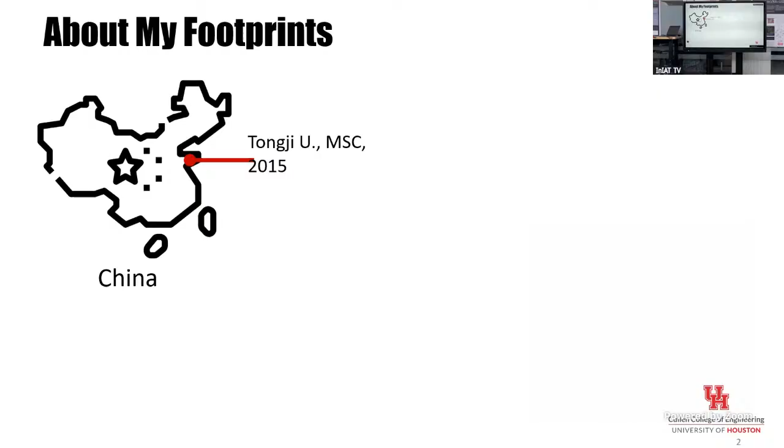Just a little bit about myself, though I think we already have an introduction. I moved from continent to continent, and of course my wife complained a lot about that. My last station was in Shanghai, China, then I moved to the Netherlands, and started my adventure in the United States. Now I'm an assistant professor at the University of Houston.

Just a little bit about the University of Houston, in case you're not familiar with it. University of Houston is the largest public research university in Houston, and one of the largest in Texas, since we also have UT Austin and Texas A&M which are also big. We are very proud of our university.

If you're familiar with the education system in the United States, the categories of R1 and R2 are very important. R1 means we have the highest level of research activity. We are approaching the milestone of 50,000 students, and we have more than 200 million dollars in research investment. Our campus is very large, about 900 acres.

A little bit about our Cullen Engineering School: we have around 2,000 graduate students, including master's and PhD students, more or less 8,000 undergraduate students, and more than 200 faculty members. We have 10 engineering majors, all ranked in the top 100, and some even in the top 10. Our overall engineering ranking is about 17 in this year's US News ranking.

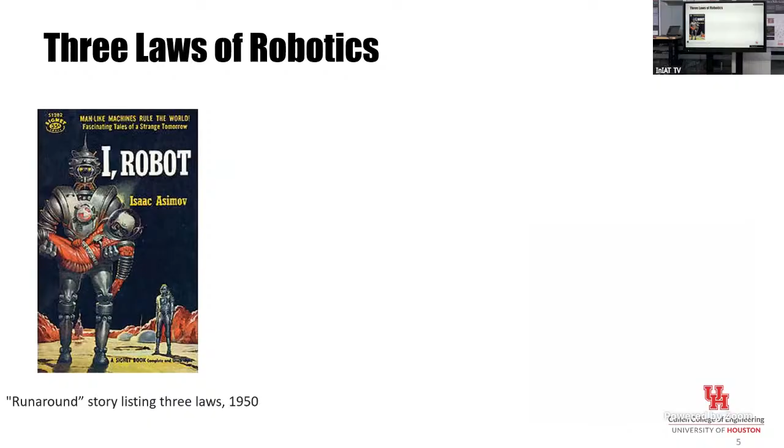I'm not sure if you agree with the 3 laws, but let me list all of them. First, the robot must not injure human beings, of course, right? Second, the robot must obey the orders given by human beings, because we create the robot, it must follow our orders. And third, the robot must protect its own existence.

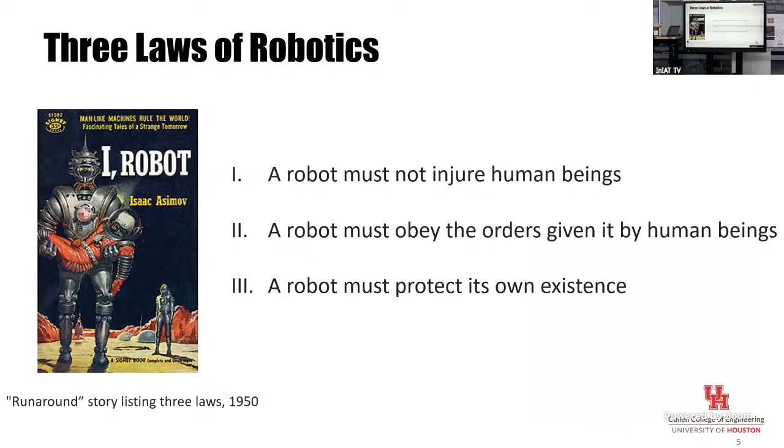If you try to summarize these 3 laws, we can say the robot must complete missions and stay safe. The first law and the third law are both about safety. One is about safety when the robot interacts with human beings, the other is the robot must be safe for itself.

Let's look at some counter examples of the robot not adhering to these 3 laws. The first one happened in a warehouse, where the robot went crazy and tried to attack people around it, and unfortunately the stop button was far away from the two workers.

The second example was from a Tesla. I can see a lot of Tesla cars running in Mexico City, but sometimes, not very often, we have also seen some unfortunate accidents. In this case, the Tesla autopilot was on, there were no disruptions to the car, but it suddenly turned left and experienced a crash.

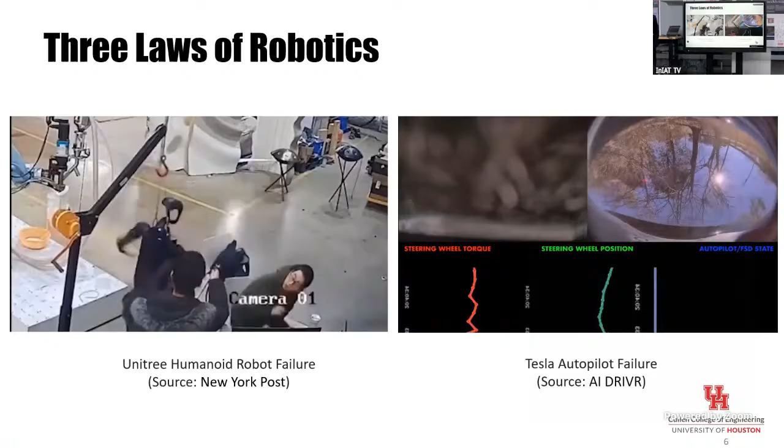Okay, those are two counter examples. So what we do in our research lab, in one sentence, is build safe and reliable autonomy, especially for robotic systems.

We have some theoretical foundations. The first one is optimization - we do robust optimization, trajectory optimization, and also machine learning: safe reinforcement learning and uncertainty quantification using deep neural networks. I'm also a control guy, proud to be one, and we do disturbance observer and rejection control - I think a lot of our colleagues are working on that. I also work on control barrier functions, a very new popular tool to guarantee the safety of robots.

All of our applications are in robotics. The first category is extreme agile robots - we do drones operating in extreme cases, like high speed or with propellers missing, so how to safely control the drones. The second is autonomous racing cars - unlike normal cars with low velocity, autonomous racing cars have high velocity and experience very large nonlinear dynamics. We also work on safe motion control under uncertainty, like manipulations and legged locomotion.

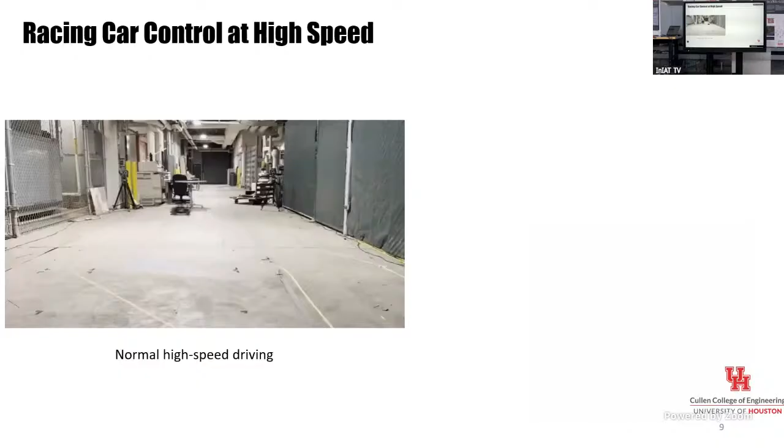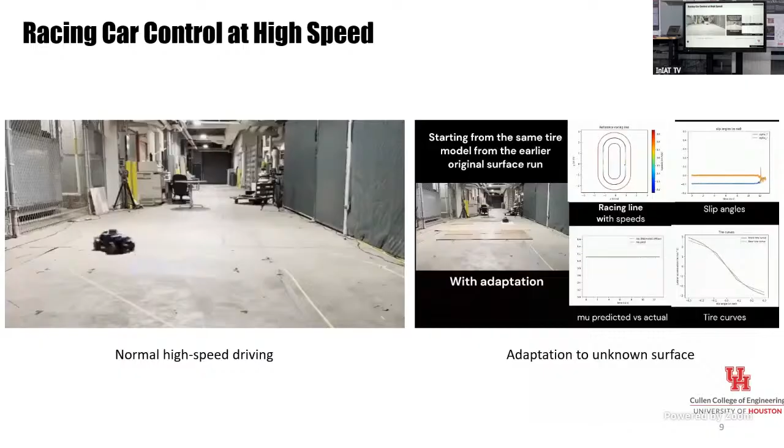We also do racing car control at high speed. For high speed, your control objective really needs to minimize the lap time. We also test how you adapt to a new surface, for example a friction change from the normal surface to another surface which is unknown in advance.

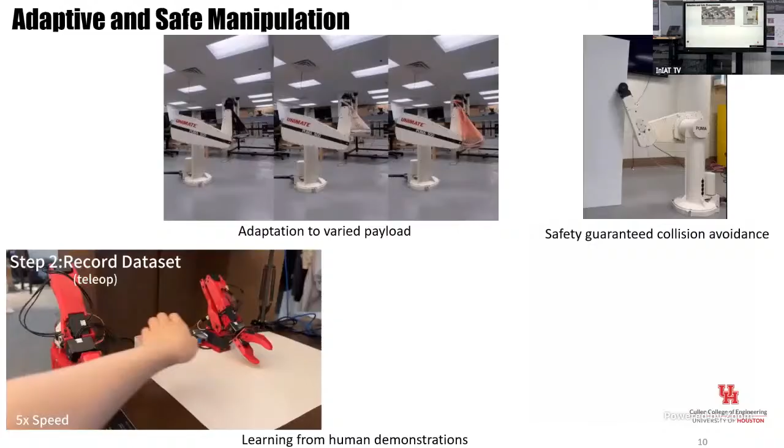We also do safe manipulations - the manipulation needs to adapt to varied payloads, and it must be guaranteed to be safe when interacting with people. We also do new stuff like AI-based manipulation.

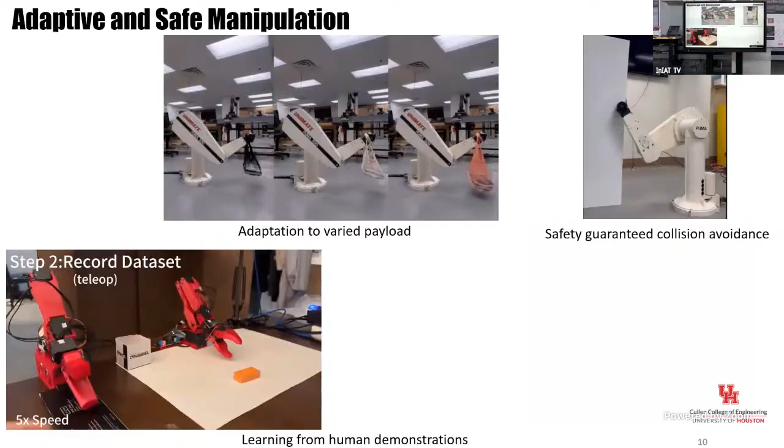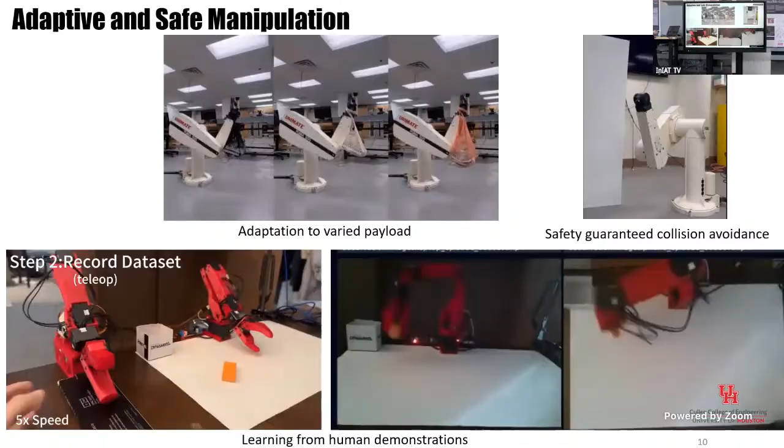I can see some colleagues here who also have these leader and follower manipulators. What we do here is use one as the human for human demonstration, collect data, and use deep learning. After training the neural network, you can deploy it to the follower manipulator, so with just a camera as input, the manipulators can autonomously pick and place.

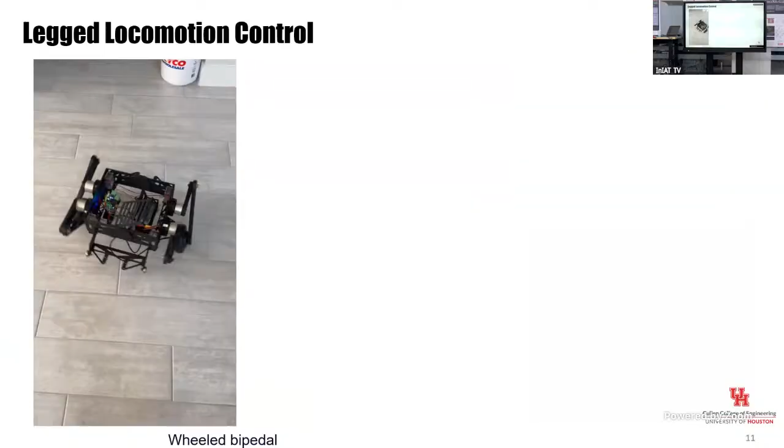I cannot show all of them, but I want to show some selected demos. We also do legged locomotion, like wheeled bipedal robots. This one isn't a balancing car - it can change height and auto rotate. There's another wheeled bipedal robot that can climb stairs.

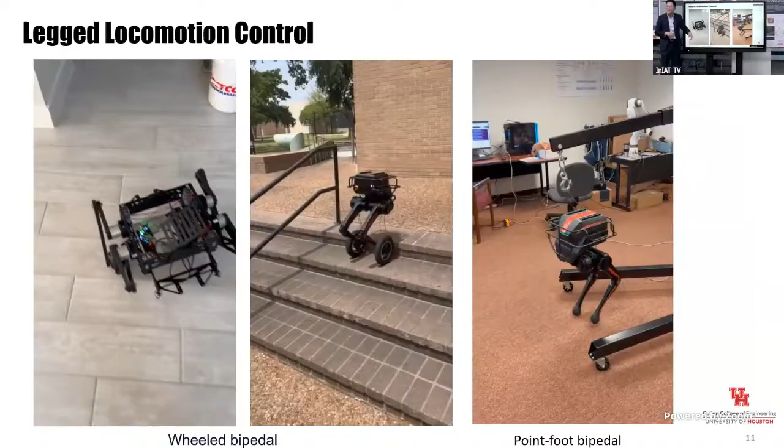The last one is about changing the wheel - you can change the mode. Now it's in wheeled mode, but you can change to point foot, and both of them are based on reinforcement learning.

Okay, so let's look at why it's difficult to follow the three laws in robotics. First of all, we look at the autonomous system. It's a very common architecture for autonomous systems.

We have the cyber component, right? We have the controller, and all the computers and computer networks in this cyber component. And we also have the physical component: sensors, actuators, as well as the physical plant.

Let's look at the first one. In the cyber component, right now we are introducing a lot of AI algorithms. AI is good, no problem, but sometimes if you have a safety critical system like autonomous driving cars, like Tesla, you cannot completely rely on AI. AI makes mistakes, but if your system is safety critical, you don't allow any mistakes caused by AI. That's why AI sometimes makes things more complicated in the cyber component.

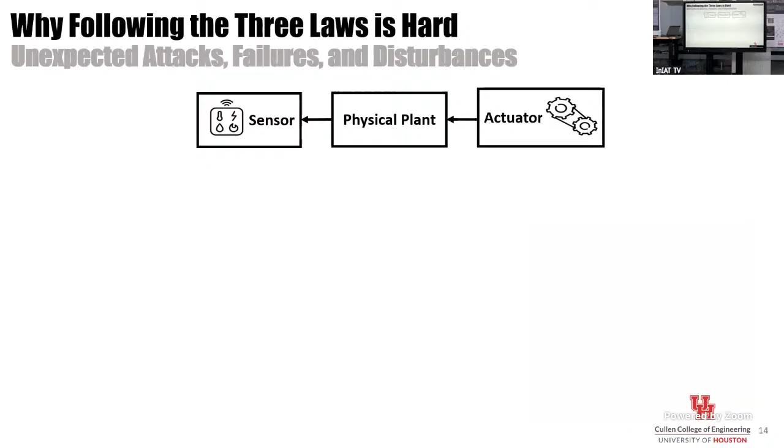And in the physical components, we have sensors, physical plant, and actuators. But we also have some unexpected attacks, failures, and disturbance.

Let's look at the first one. If you play with drones, the first very important lesson you need to know is that you need to make sure all the screws are not loose. If you lose any of the screws, the propeller will be gone and the drone cannot be stabilized.

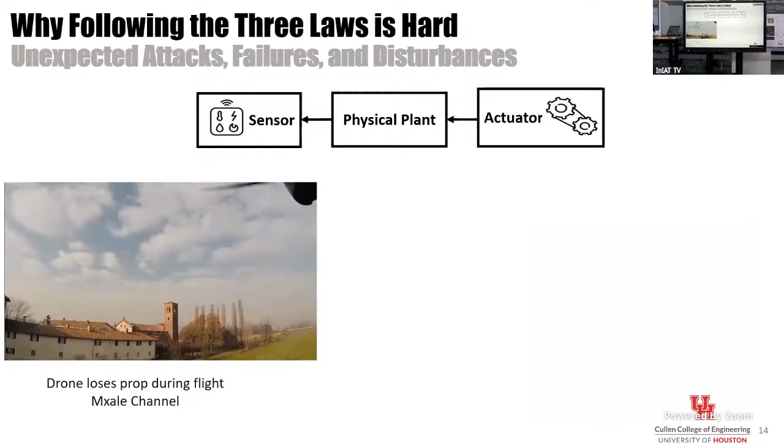And the first one is very interesting - there was a drone in Canberra that delivers coffee to customers, but it was under attack by a raven. So that's something we don't expect in advance.

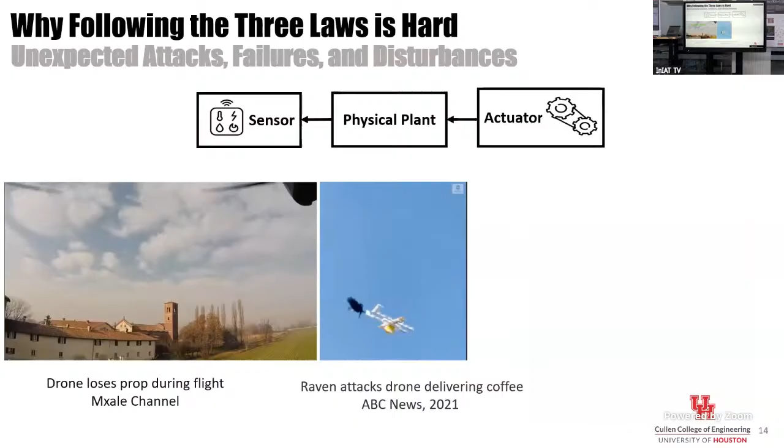And we also have some unexpected disturbance like wind. Of course, this is in a lab environment to simulate the real world, but we have a strong wind as disturbance. So all of this makes the problem very challenging to guarantee reliable and safe operation of robots.

So today's talk will be divided into three parts. The first is how to measure the disturbance and how to reject the disturbance. The second is, if you have disturbance, how to guarantee safety. And the last is how we can combine some advanced algorithms like AI, machine learning, reinforcement learning with disturbance rejection to improve performance.

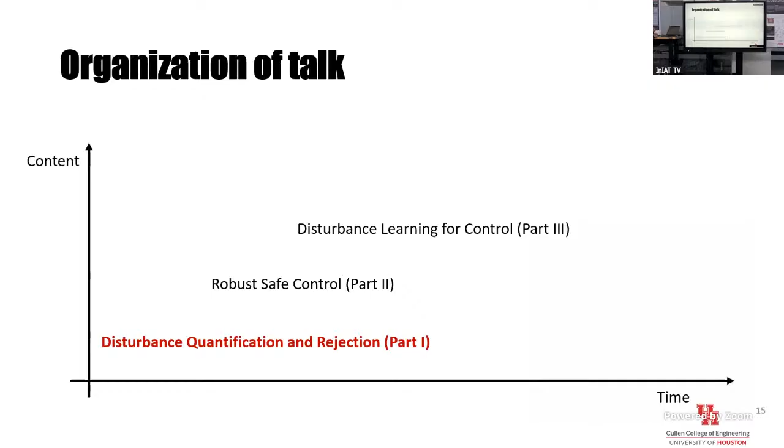So today I will talk about disturbance as a term more than 100 times, but that's just my story. Disturbance is like the very strong line connecting everything together. Okay, let's start with the first one: disturbance quantification and rejection.

Let's look at a closed loop control system. I believe some students are from mechatronics and have studied control courses, so you're familiar with this. In a closed loop system, we have a reference - suppose you have a drone and the reference is like the desired position or desired attitude. You design your controller, the controller outputs the control action executed to your plant, and you also have some measurement using your sensors. This is a very typical control system.

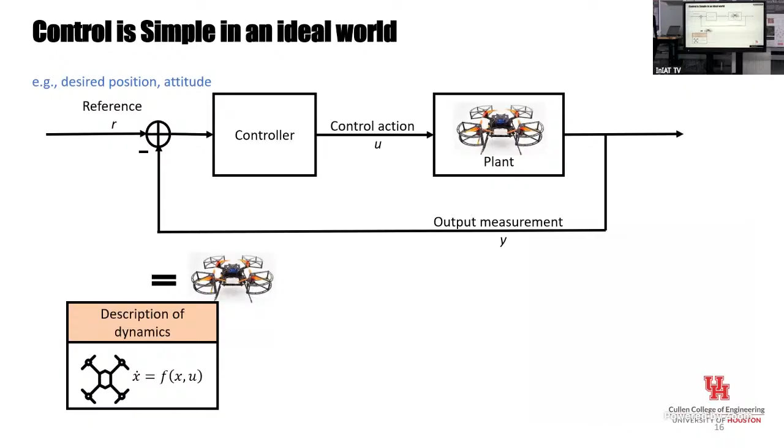If you know the precise dynamics of your system, control is very easy, because you can more or less predict everything that will happen in the future. You know everything about the reachability of your system, so of course, the control action can make sure the output measurements precisely track your reference.

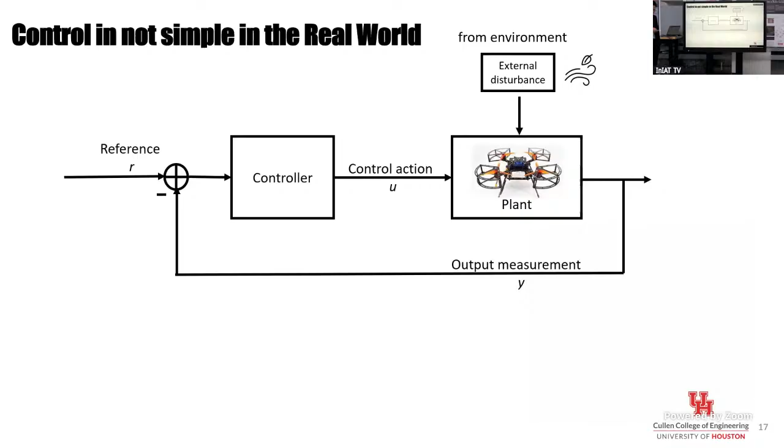But the real world is nasty, right? We have a lot of disturbance from the environment - for a drone, we have a lot of wind around us; for a car, it's running on a bumpy road. This type of disturbance is from the external side. But we also have internal dynamics, because it's impossible to precisely model a dynamic system - you always make mistakes. Even though you spend a lot of effort, you still have a lot of things you cannot model. So you have internal disturbance and external disturbance.

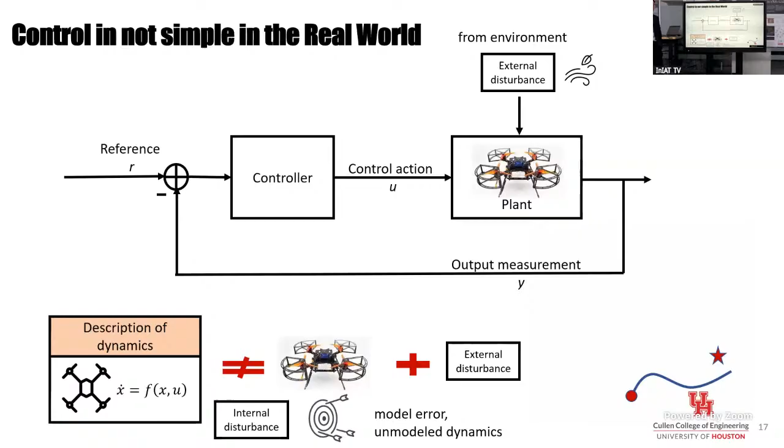That makes your system always have some offset from your trajectory to your reference, which is your goal. So how do we manage this problem? The key problem is about how we can measure the disturbance.

In most of the cases, you cannot use some physical sensors to measure disturbance, because you don't know what's the disturbance, right? For wind, probably you can use some sensor to measure the wind, but for some disturbance from the internal dynamics, you have no clue how to install any type of sensors.

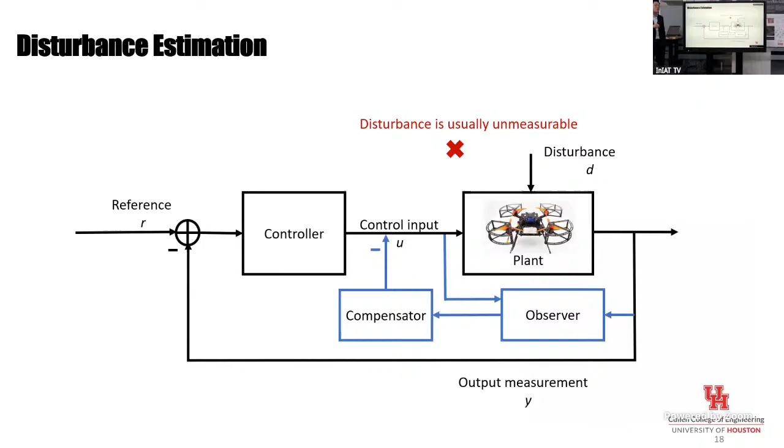But instead, what we can do is design some sort of observer. The observer is just an algorithm, right? It's not a hardware stuff. So if this type of algorithm can estimate the disturbance, and we try to compensate the influence of the disturbance, that'd be good. Okay. So that's everything about the disturbance estimation.

I can give you one simple example about the drone attitude control. For drone attitude control, we have 3 dimensions. One is pitch dynamics, the other one is roll, and we also have the yaw. So all of them are just first-order dynamics, right? Very simple. But I just use this as a running example.

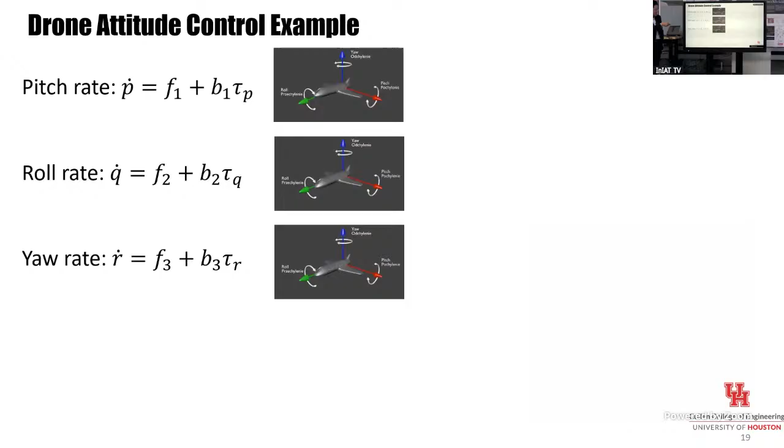What is disturbance rejection? Disturbance rejection is just trying to minimize the influence of your disturbance. And you just need to follow 3 simple steps. The first one, you estimate your disturbance. In each channel of these 3-dimensional dynamics, I have F1 as a disturbance in the pitch, F2 disturbance in the roll, F3 disturbance in the yaw motion. And I just need to estimate F1, F2, F3.

And the second step: if your control action and the disturbance are, we call it matched in control theory, it's just like you have a control action here and a disturbance in the same channel. What you need to do is very simple. This is your disturbance, this is your control action. You just need to have the control action in the opposite direction of your disturbance, and then you can cancel them out.

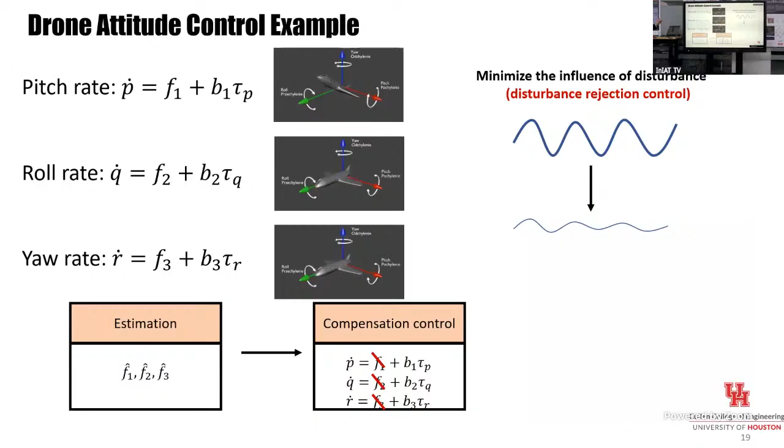If you cancel the disturbance out, what we are going to have is a clean model. A clean model is nice, it's just what we want. For a clean model, you can easily design any sort of controller, so even a linear controller can handle this attitude control. Okay, that's the basic idea of disturbance rejection.

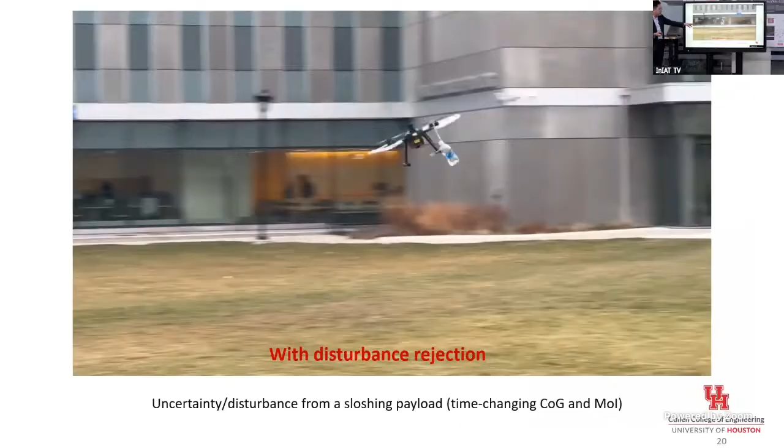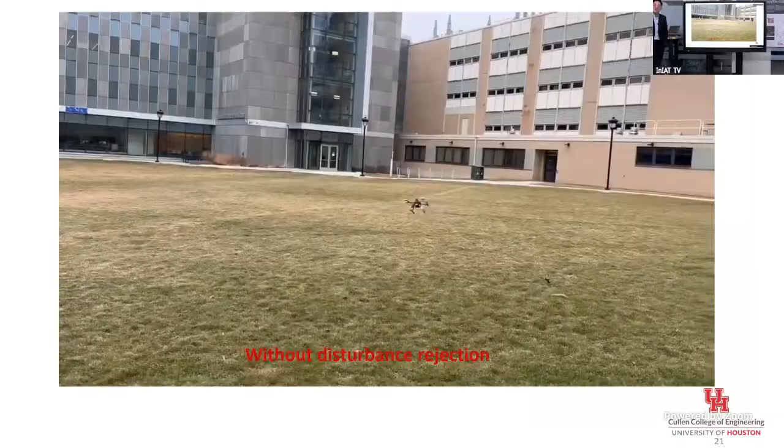Let's have an in-depth look at this demo I just showed you. We have the disturbance from the sloshing payload. When our disturbance rejection algorithm is on, you can see the attitude is stabilized; no problem with roll, pitch, and yaw. But if you turn off the disturbance rejection and just use a simple baseline, PID control, which has some disturbance rejection but not in an explicit way, you can see the drone almost crashed.

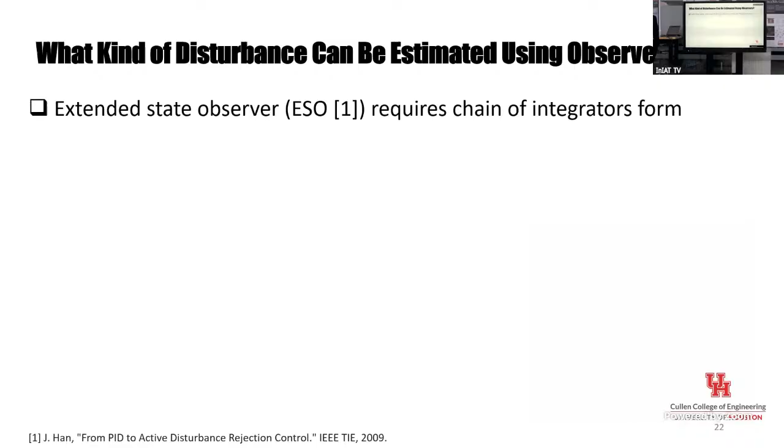The first fundamental question we need to ask ourselves is what kind of disturbance can we estimate? Can we estimate all disturbances, or do we have some requirement for our dynamic system? That is the very fundamental component in ADRC theory, which we call the extended state observer. The extended state observer requires the dynamic system to have a form we call a chain of integrators.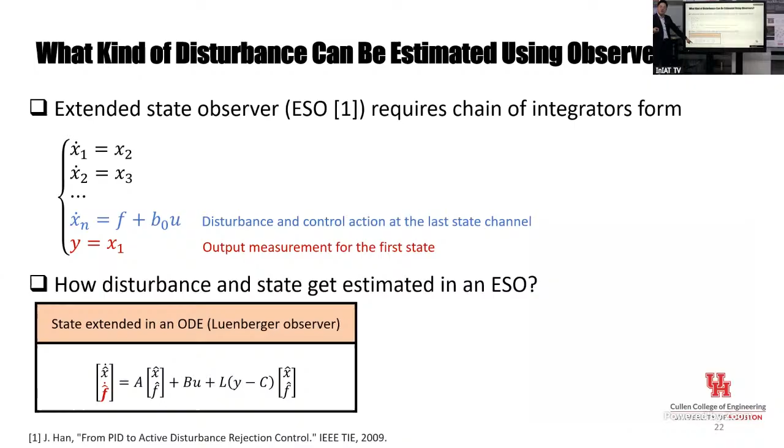The extended state observer is just a bunch of differential equations. This is a differential equation, this is another differential equation. The difference is that in our observer we will have an extended state, which is our disturbance. So we have our original state and we extend the dimension to include our disturbance. Because this is a differential equation, you just need to integrate.

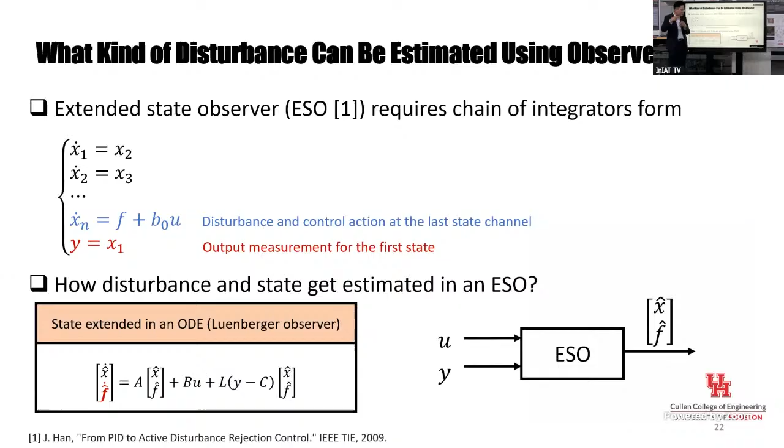If you integrate, you will always estimate the state and your disturbance. So if you think of the extended state observer as a black box, the input is just your control action and your measurement, and the output is the estimation of your state and your disturbance.

Very simple. The first very important progress in our recent years in our lab is that we really expand the application of ADRC theory. Actually, we don't need this requirement anymore. You don't need to be restrained to integrators. Actually, you can deal with a more general system, like we have a nominal linear system, right? A matrix, B matrix, and your disturbance can be nonlinear and time-varying. It's very general. And our requirement is that you need to satisfy this bunch of equations.

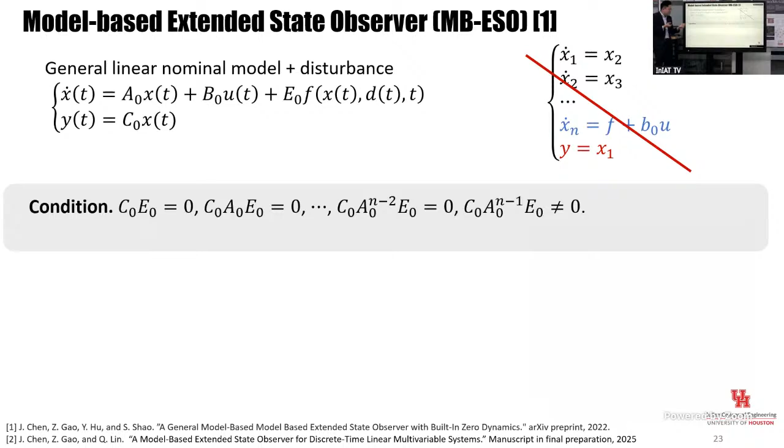Don't worry about that. I will explain to you what's the meaning of these conditions. But what you need to do is give me one dynamic system, right? I will just use this as a certificate. I just check if you satisfy all of that. If you satisfy all of that, I can design an observer. That's just that simple. And if you satisfy these conditions, all of your disturbance can be estimated without any bias. You can have unbiased estimation with exponential convergence guarantee.

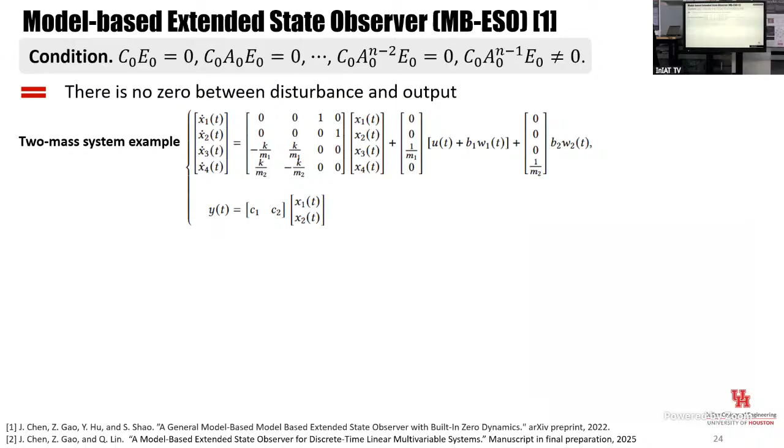Okay, let's look at what's the meaning of these conditions. It looks very weird. If you try to describe this condition in another way from classical control system theory, it is that there is no zero between your disturbance and output. Let's present what that means. Let's look at a two-mass system, just like this one. I have one mass, a second mass, and they're connected with a spring. This is a very fundamental block in mechanical systems. Just use this as a running example.

If you look at this system, this is not a chain of integrators. This is a very general linear system, plus some disturbance like W1 and W2. W1 is from the first mass and W2 is from the second mass. In the first case, we have a position measurement from the first mass, X1, and the disturbance W1 from the same side; both are from the first mass. And you can compute the transfer function, which is just the description of your input-output relationship.

If you look at the numerator, we actually have two zeros. So in this case, there are two zeros between your disturbance and output measurement, so it doesn't satisfy this condition. What's the meaning of that? You cannot estimate this disturbance without bias. So this is a bad example. Okay, and what is the good example?

If I have the measurement for the first mass and my disturbance is in the second mass, now you compute the transfer function. If you look at the numerator, there is no root. This is a polynomial, but it's just a constant. There's no zero between your disturbance and output measurement. So for this case, you can estimate the disturbance W2 using your output measurement X1. Does that mean you cannot do anything with the first case? Well, you need to change something, right?

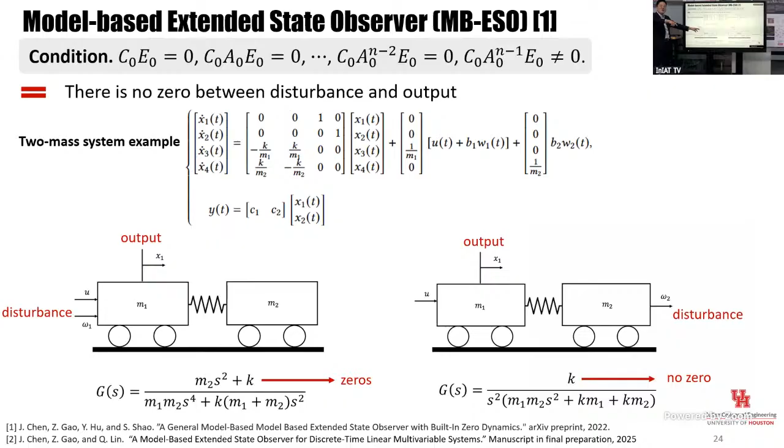The second contribution is that with estimation, you always have error. So what's the bound for this error? We not only look at the final steady state, because we say that we always converge to the true disturbance, but it might take time. We call it the transient phase. In the transient phase, what's the error bound? That's very important for, for example, optimal control and robust control. You really need this gap.

So that's the first time we get a very tight error bound for, we call it model based, because in the original ADRC we call it extended state observer, but our new theory we call it model based extended state observer. So for model based extended state observer, we can have very tight error bound, and this error bound is directly from the solution of your differential equation. So it's guaranteed to be the most tight.

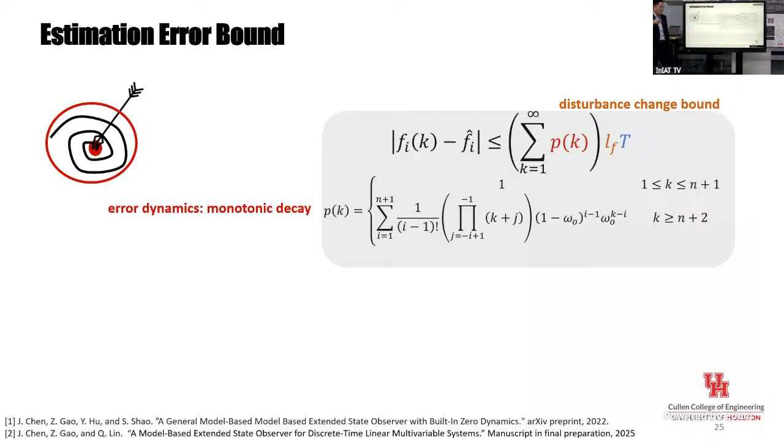Okay, so I'm very proud of my students' progress in the theory. I think it's a very big leap in the ADRC theory. So we can apply to more general systems, and we have better estimation error bound. And of course, we just have a preprint, I think 2 years ago. Now we have extended, because what I talk about is single input and single output system, right? We also extended to multi-input and multi-output. So we are preparing this paper to include all of our amazing progress in the theory part.

So if you have this theory, you can do a lot of things. The first application I want to show you is about fault tolerance control of drone. Most often the drone you see is a quadcopter, right? So you have 4 rotors, and you can keep balance. So what if we lose 1, 2, 3 rotors? Of course, you cannot lose 4, right? With 4 you always have a crash. But what if we lose 1, 2, 3? Can we still control the drone? Have you thought about that? The simple answer is that it's still possible.

And the first interesting fact of physics I want to share with you is what we call reduced attitude. For example, in this video, 2 rotors are gone, right? You only have 2 opposite rotors. You can still control, but what do you compromise? If you want to control the drone from position A to position B, you need to compromise your yaw motion. You can see the drone is rotating around the axis, right? Because you have fewer motors, you cannot control everything, and you need to sacrifice the yaw. So from position A to position B, the drone will be like this, right? You need to compromise one thing.

And how do we control that? So imagine the ideal case, this is my drone. I'm sorry, I don't have a real drone. So this is my drone, and I have a rotation axis. The ideal case is my drone rotating like this, right? But probably when the control is not good, my drone is like this. So you have your current rotation axis, but you also have your ideal rotation axis. If you align these 2 rotation axes, that's good. You can still stabilize the pitch angle and the roll angle. You need to sacrifice your yaw angle.

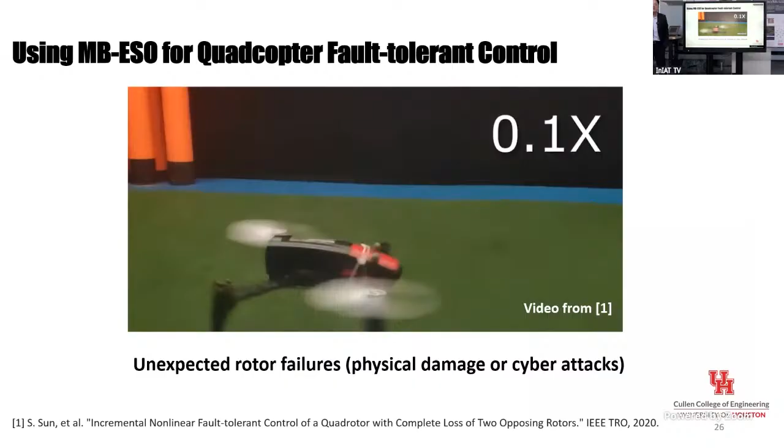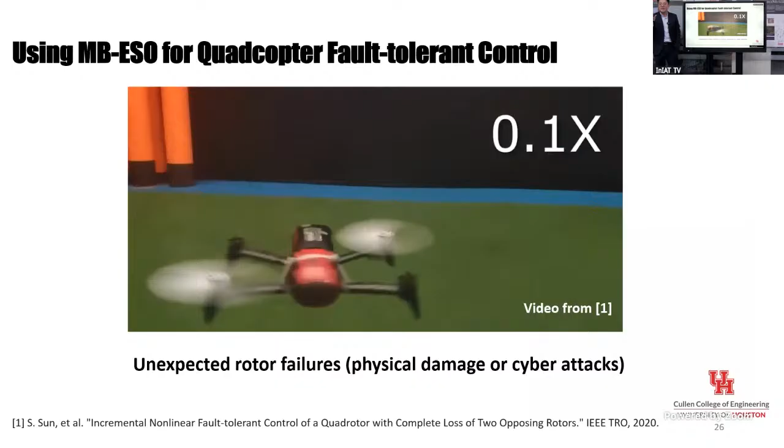Okay, so the drone application is highly nonlinear, multi-input and multi-output. And using our model-based extended state observer theory, you can easily design a couple of observers. You split into some subsystems, and for each subsystem, you make sure you satisfy the condition, the ugly mathematical equations I showed you. You make sure that all the disturbance can be estimated without bias. And then you can try to reject the disturbance.

And so far, we published a paper in Control Systems Letters, but the result is still in simulation. That's one possible project I'm going to work on with Professor Ramirez, so probably we can do some more interesting hardware experiments. But in this paper, we compare with state-of-the-art work, 4 or 5 years ago, published in IEEE TRO, and we show that our performance is even better.

And if you look at the experiment, we only have 2 rotors, and we also have a very strong wind, 15 meters per second from left to right. So we have the combination of two very challenging conditions: one is you lose two rotors, and the other is very strong wind from the external world. And the TRO work cannot keep the position of the drone, but our drone still survives in this condition.

Okay, let's look at the key takeaways for the first part. In our lab, we work on disturbance quantification and reduction, and that's the key and fundamental problem for reliable robotics control. And we developed some fundamental tools for disturbance estimation with convergence guarantee and tight error bound. That's the first part. Let's move to the second part. What's the difference between the first part and the second part?

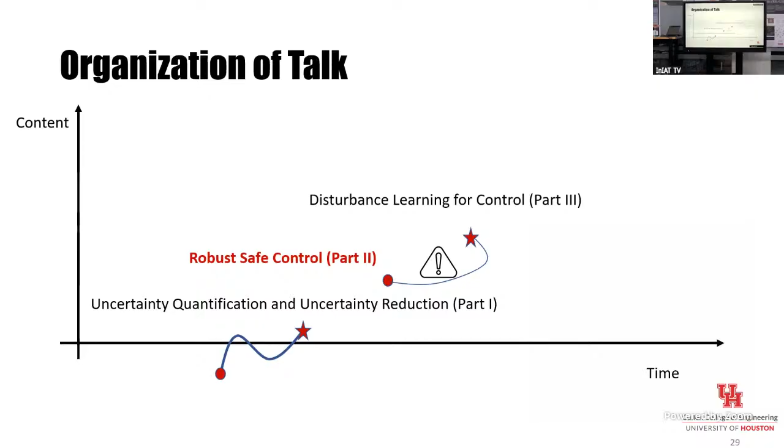And how can you make sure that you can move from position A to position B and you don't have any collision with the obstacle? And the guarantee must be 100%. Okay, we don't allow any possible mistakes. Okay, that's the second part. We call it robust safe control. Now let's look at the control barrier function, how we can use control barrier function to guarantee the safety.

Now let's look at another closed loop system, but now it's more advanced. You have a controller which is AI based. It can be deep learning, it can be reinforcement learning, it can be any fancy algorithm, or it can be any legacy controller. You already control something, you already design something, right? It's AI or non-AI, it doesn't matter. But you already have something. The question is that the existing controller, you don't trust it. It might make mistakes. So how can we monitor this existing controller and modify if necessary, right?

So the nominal controller, you will output a nominal control action, which is U bar. Okay, and U bar will go through a block, we call it safety filter. The idea is very simple. If U bar is safe, okay, it's ready to go. No problem. You can execute this control action to your plant. But if it's not safe, we need to compute something safe to override your U bar. Right? Does that make sense? It's like a failsafe, right? The idea is a little bit about the switching, but it's not really switching because we just need one single optimization to achieve that.

Okay, so how to do this? First of all, you need to define your safety problem, right? You need to define a safety set. What's the meaning of a safety set? So for example, h(x) is greater than or equal to 0. For example, the relative distance between your robot and your obstacle, the distance must be greater than or equal to 0, right? That's your safety, we call it safety specification.

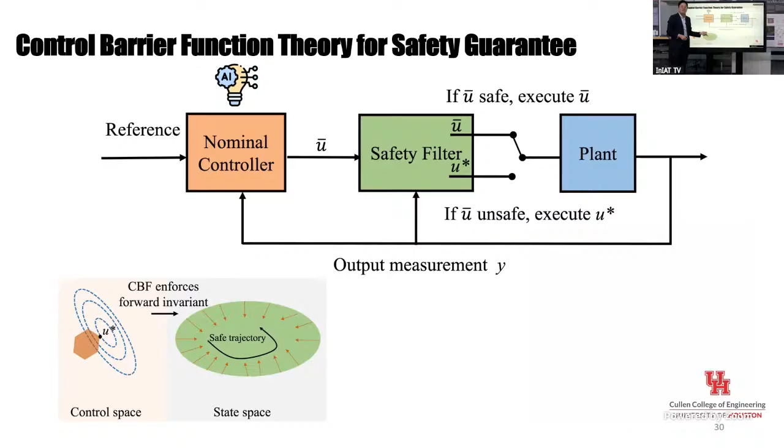As long as you have this safety set, and if you have a control barrier function, the control barrier function will generate some field along the boundary of your safety set. If your trajectory is about to leave this safety set, this is not what we want, right? You can look at these red arrows. If you're about to leave this safety set, it will be pushed back to the interior of your safety set. So you always guarantee that the trajectory of your system stays in this safety set. That's the basic idea.

Okay, so how to achieve that? We just need a mathematical optimization. We call it quadratic optimization because if you look at the objective function, it's quadratic, right? The quadratic is based on the distance. U is your final control action to your nominal control. Nominal control is something proposed by your AI or whatever, right? So you just want to minimize the distance. And the idea is very simple.

If your U bar is safe, it means that U bar satisfies these safety constraints. If it is safe, what's the final control action? It will be identical to U bar, right? Because the objective function is quadratic. The minimum value you can achieve is just 0, right? Quadratic. So that's why if U bar is safe, you always have the final control action which is identical to U bar.

But if it's not safe, if the AI control action is not safe, I will compute something safe, but stay as close as possible to my proposed control action, right? Just like you have a very fancy algorithm, I don't want to intervene very often. If you are good, I can let you go. But if you are not good enough, I will try to stay close to you, but I make sure that the final control action is safe. Okay, that makes sense? That's the basic theory of control barrier function.

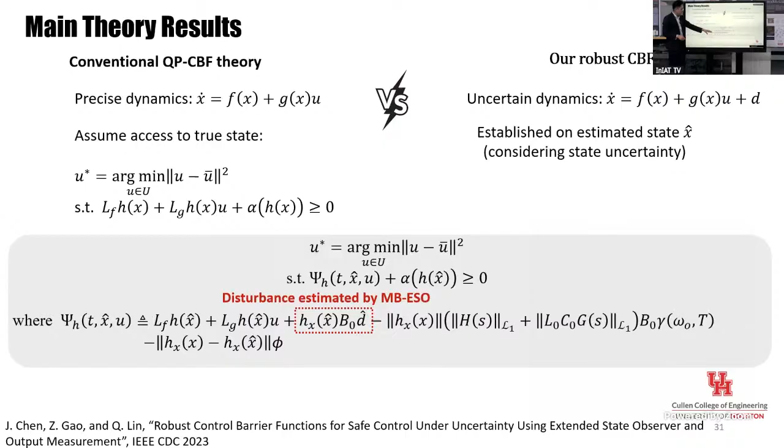But the problem of control barrier function, like a lot of optimal control, is that you need a precise model. You need your precise nonlinear dynamic model, and you also need precise state, right? Then you can guarantee the safety. But if we apply our robust control barrier function, integrating our model-based extended state observer, what we can achieve is a robust optimization. So you have your original optimization, right? Now you just need to add the disturbance. The disturbance can be caused by model error, can be caused by external disturbance.

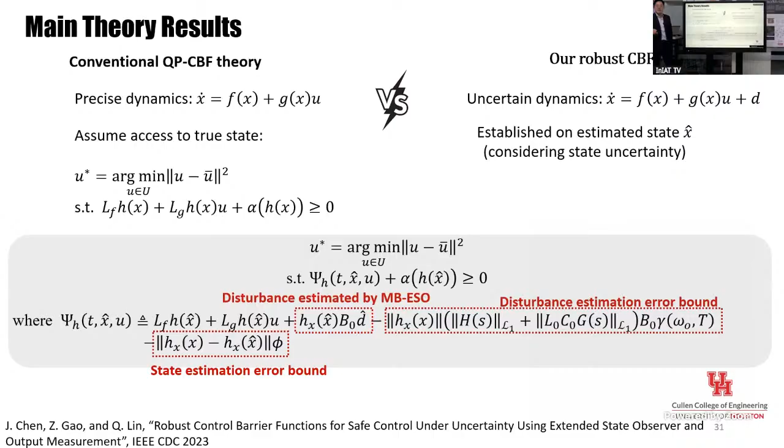And you also account for the estimation error bound. We derive a very tight estimation error bound. And we also consider the state estimation error. So what's the meaning of that? Even though you have an imprecise nonlinear dynamic model and you have uncertainty in your state, we can still guarantee the safety. Okay.

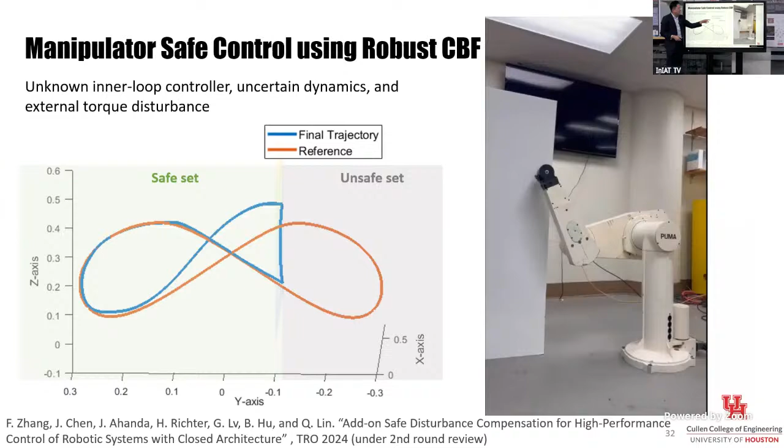But when the robot approaches this area, right, it's at a safety boundary. If you require me to cross the boundary, our safety controller will kick in. No, don't do that. You need to keep safe. So that's why our final trajectory will not exactly follow the reference, because the reference is wrong, right? Even though you require me to do that, I know my safety problem, I can always guarantee the trajectory is in front of the whiteboard, okay?

But if you apply a traditional control barrier function, there's no guarantee. The end effector will push the boundary, and imagine that this is a human worker, right? It will hurt the human worker. Okay, that's a very simple demo. I show you the power of our safe control.

And let me summarize the key takeaways here. The first one is very important: even if you forget everything about my mathematical equations or observer design today, you need to keep in mind one important concept, that AI is good, but if you apply AI to a safety critical system, you cannot always trust AI. The AI-based controller or any legacy controller must be always monitored and intervened if necessary, right? This area is also becoming very popular. We call it AI safety, right?

And the second one is that our fundamental tool, we call it robust control barrier function, can overcome the traditional control barrier function's fundamental limitations. We don't need a precise model. We don't need a precise state. We can still guarantee the safety. Okay.

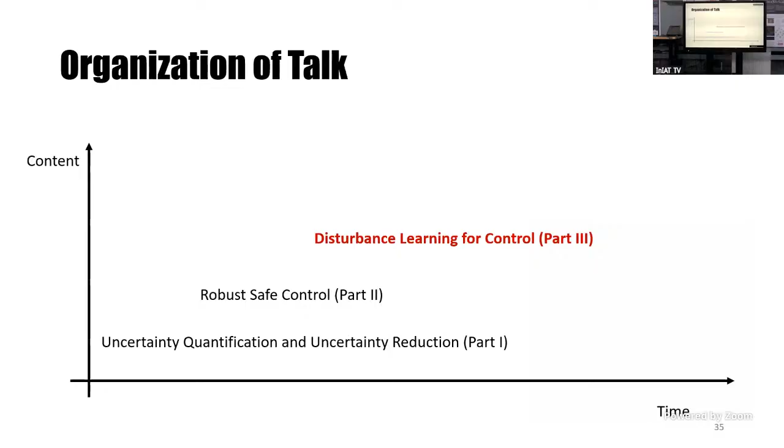Now let's move to the third part. I believe the third part will be a little bit brief because all the theories are in the first and the second one. The third one is how we can combine machine learning, supervised machine learning and reinforcement learning, with our disturbance estimation to improve the performance for disturbance reduction control. Okay, let's look at how machine learning is used in a control problem, right?

So imagine that you have a not precise model, we call it the nominal model, and you have a true model, right? It's not possible to get the true model. You always have a nominal model. But every time you can estimate the difference between your predicted state and the true state, right? If you look at this, it's the dynamic system in discrete time, right? In discrete time, your next state is equal to your dynamic model times your time step plus your previous state, right? If you can estimate the difference of the two states, you can estimate the difference of the two models, okay?

And the difference of the two models, we call it discrepancy, or people also call it residual learning in the machine learning domain. And you can use a deep neural network to capture the difference between these two models using supervised learning, okay? And if you have this residual error from the neural network, what you can do is take your original model and add the residual error.

And you hope that this final model will stay as close as possible to your true model. That's the basic idea of machine learning in control theory. As long as you have this adaptive model, you have a nominal model and always add a neural network. You can design the controller based on this adaptive model.

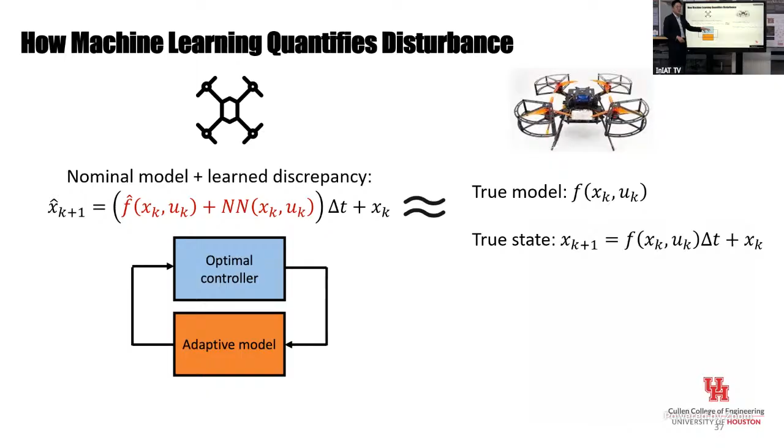If you look at this demo in our ICRA work from last year, we worked on a racing car, which is a difficult problem because when your speed is high, you have a lot of friction, a non-linear tire model, and also some aerodynamics. That's a very challenging problem.

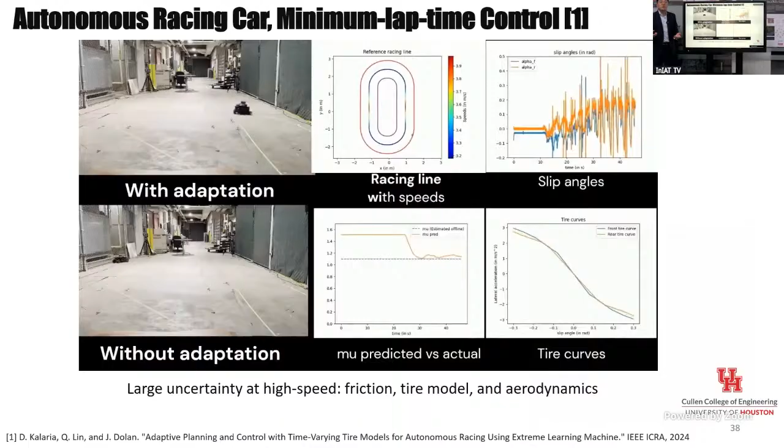If you don't have any adaptation and just use an imprecise model, you can see that after 3 laps your racing car experiences a crash. But if you have some learning for the disturbance or the uncertainty, you can always achieve minimum lap time, and the car is always safe, staying on the track.

We also have another demo where my student changed the friction. You have an original friction from your original ground, but now you use some cardboard and change the friction, and you can see the car is still able to adapt to the sudden friction change. The control is still adaptive and safe.

The limitation for machine learning is you need to collect a lot of data to train the neural network, and during this training you don't have any guarantee. You need to make sure the neural network will converge at some point. That's why one of our motivations is that our observer approach has a very strong guarantee, while machine learning doesn't have a lot of guarantee. But machine learning is very good at doing some nonlinear optimization and learning a lot of prior knowledge about disturbance.

Our idea is simple: how to combine them together. If you look at the dynamic model, we have our nominal model, which is not a precise model. We have some internal disturbance caused by our model error, and we also have some external disturbance from the environment.

Our idea is very simple: what if you can learn this part using machine learning? There is one very important concept in control theory called 'there's no free lunch.' You can use your observer to estimate everything, but if the disturbance is very large and changes very fast, you can increase your observer gain to still track and estimate it. But if you increase the observer gain, just like the control gain, the system becomes very easy to become unstable and very sensitive to noise. So you cannot always increase the observer gains.

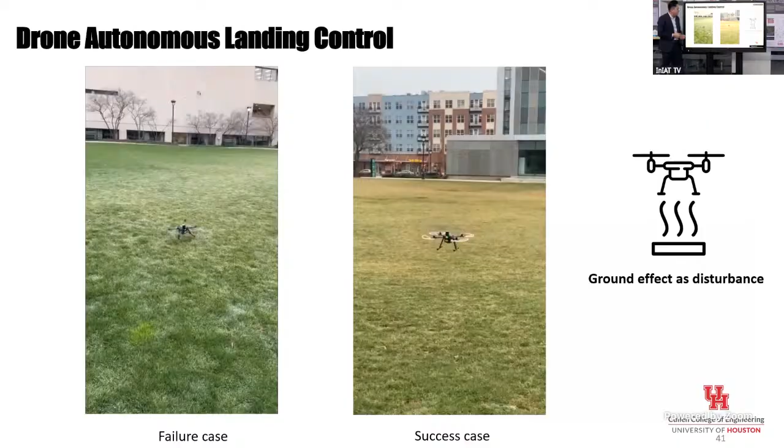Let's look at some comparison. If you only use deep learning, how do we use deep learning for the landing? You just take off, landing, collect a lot of data, learn the disturbance, and try to design an optimal control based on that. And we just change a little bit.

If all the data is from this ground, I think the testing environment is still good. But if you change your ground to a grass ground, your landing will not be successful, because different properties of the ground have different properties of disturbance. Machine learning doesn't generalize well to different environments. You can see you have some collision here.

But if you only use model-based ESO, like our very strong disturbance rejection control, because we have a lot of noise and we use a small observer gain, it's safe, but the landing is still not successful. You still have a very small gap between the ground and your drone.

But if you combine them together, machine learning provides some prior information and the observer tries to compensate. The landing is successful and smooth.

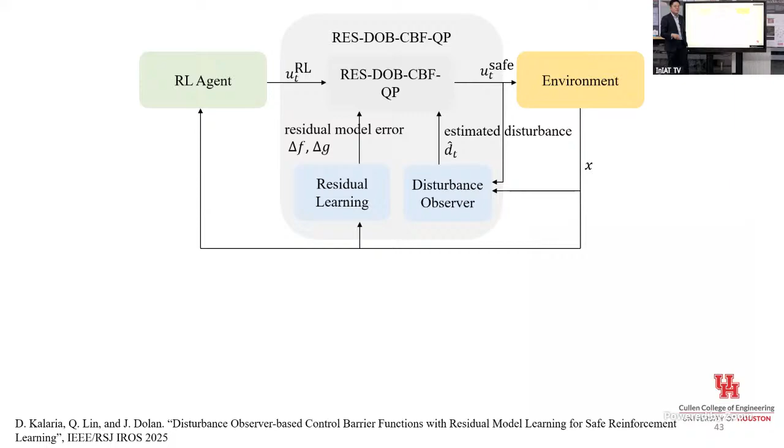But if your model is imprecise and you want to account for some uncertainty and model error, what we need to do is use this robust control barrier function. You have some nominal model, some learning, and some robust optimization. You combine all of them together and make sure that all the action in the replay buffer is safe. That's the very basic idea, and you can check out our IROS paper this year.

And we do some experiments. All the learning is hardware learning. We don't learn in simulation, because if you learn in simulation and deploy it to the real world, you always have some gap. So we just do RL on the hardware. This is our approach, and we compare it with some baselines.

For example, this one, you don't have any control barrier function. This one, you have some control barrier function, but the model is imprecise. And we can look at the final results. This is our final result.

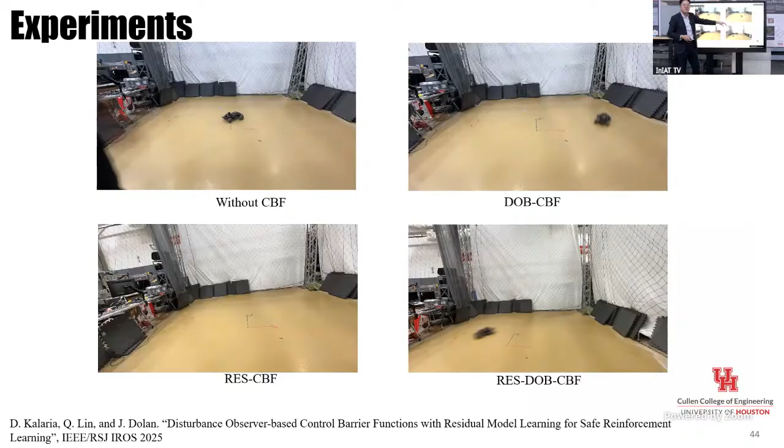And the control objective is very simple: we just want to learn a navigation policy. I want to navigate the car from position A to position B, and I have some unsafe zone. I want to make sure I have the minimum commute time, moving forward and back to achieve the minimum time, and also avoid any collision with this unsafe zone.

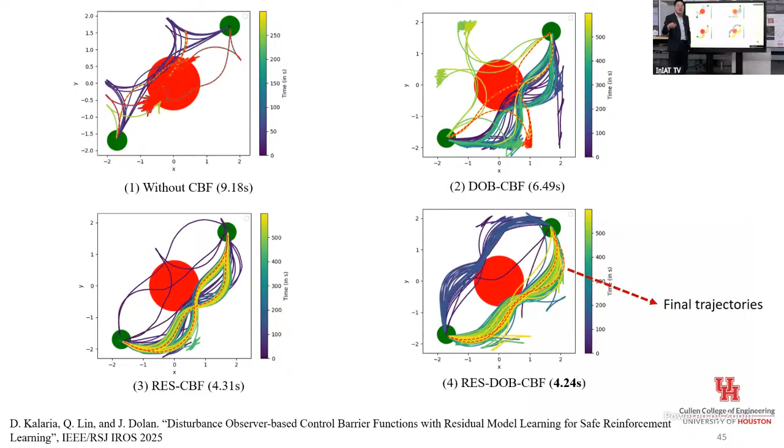If you look at the final trajectory, we don't have any intersection between the trajectory and the unsafe zone. But these baselines are very terrible: you have collision in one case, and in the other probably you don't have collision, but the time is not optimal. So we achieve safe performance and minimum commute time using RL and our robust control barrier function and disturbance rejection.

Yeah, I think that concludes my talk today. And...

I hope that this trip, I come here to make friends, not just with two of you guys, but with everyone. And we look forward to long...

50 minutes, okay. Yeah, don't be shy. You're just like my students, right? Okay. Question here. Okay, you go first.

Hi, can you listen? So basically, you're saying that we can complement the AI with a controller to make it better. That's the reason, yes, if I understand correctly. So your AI doesn't need to be perfect.

We have the AI, and we have something outside the AI. I can make sure that your imperfect AI is safe enough to be implemented in my robotic system. Because it's not possible to design a perfect AI and safe controller at the same time. It's not possible.

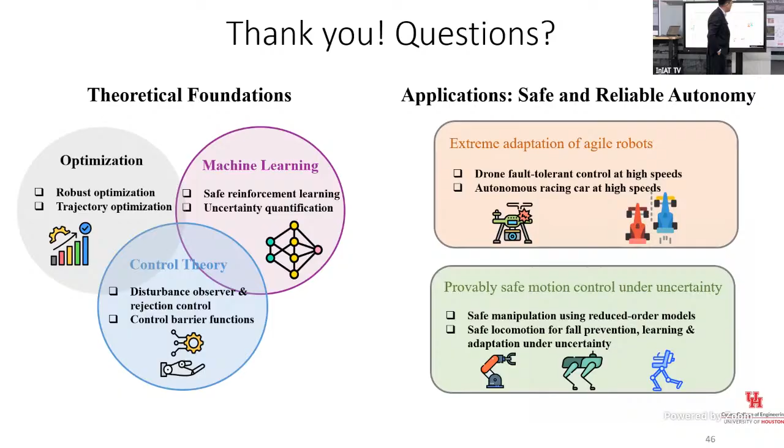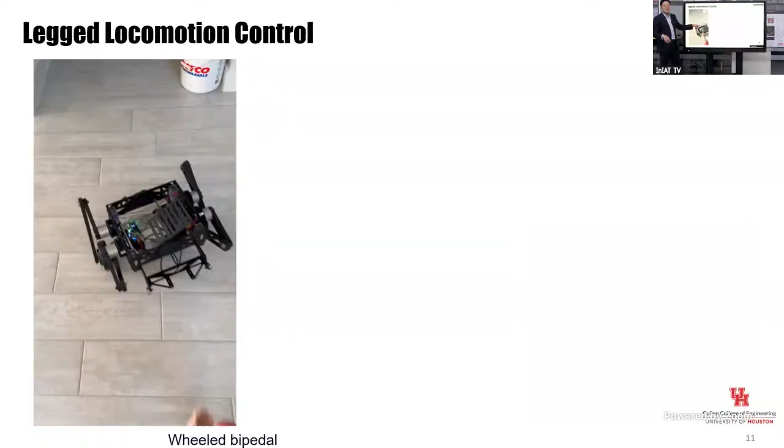So one project, I'm not sure if I showed a video here, but probably I can show something you can experience. For example, this robot, it's a wheel-legged robot. Actually, I spent my summer building it by myself. I did it by myself. You can get some 3D printed components, and you have Arduino.

What we can achieve is that the robot can change its height. Suppose I have a robot and I want to move from this position to that position, but I have a chair. I really need to lower my height, go through, and go up again. There's a lot of disturbance rejection involved. My leg is kicking this robot, trying to unbalance it, but if you have disturbance rejection control, you can always recover.

For this type of thing, it's not difficult. There's no ROS, there's no Ubuntu. It's just simple Arduino. You just need to know some simple C code, and some simple PID control. You can start with PID, and then move to newer algorithms. This is one I can recommend to you.

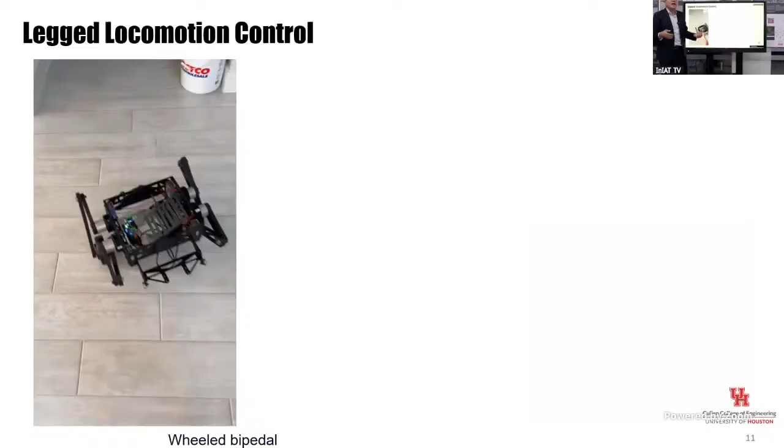The other one I'm also trying to collaborate on with Mario is a jumping robot. So the robot can jump. How can you achieve jumping high, jumping further? There's a lot of disturbance, because when the robot is flying in the air there's no disturbance, but when it lands on the ground there is some disturbance, so the robot might tip over.

And that's also very simple. You design some, I think it's just a TI board. I'm not sure if students study the C2000, and that's just a microcontroller. You just need some C code, and that one is also very possible for a student project.

Okay. Hello, is Python useful for getting this kind of prototype? Yeah. Python is a good way to get this. Oh, because it depends on the platform, right? Because for Arduino, it's more compatible. It's just C, right? But the C is simple C. You don't need any fancy C. It's not any fancy algorithm.

Because if you look at the control algorithm, it's just a bunch of equations, right? That's the beauty of control. If you design in a proper way, 5 lines of code, 10 lines of code, you solve the problem, right? Okay. Yeah. Okay.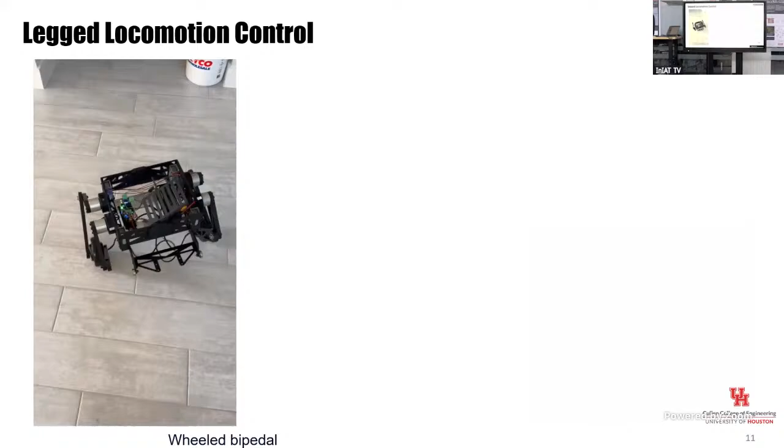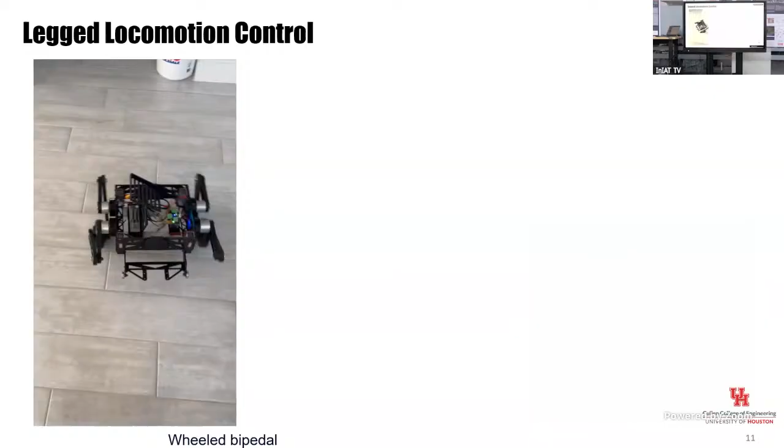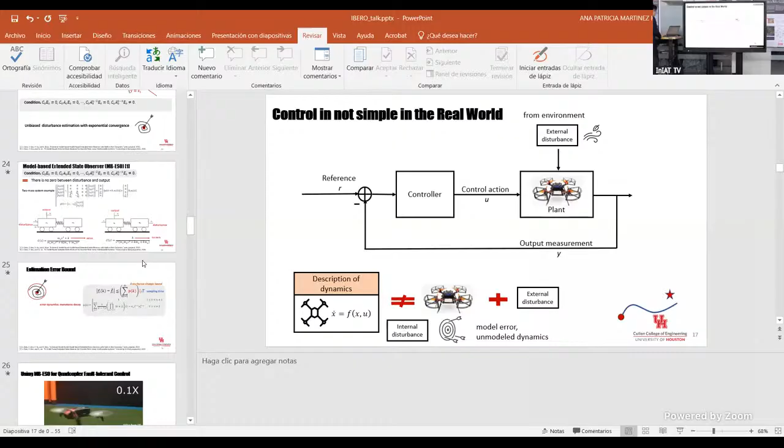We have one question here. Yeah. Hi. Hello. 2 questions. How do you integrate AI into control? What kind of data do you give the AI to learn? Okay. So if you look at this one, let me jump to my slide here. Here, this one, yeah. So this is a very typical supervised learning problem.

What data you need to collect is that you have your model, right? So the goal is that you want to measure your model and the true model, because we always have a gap. You want to measure this gap. And you have what data? You have your predicted data, because you have a model, right? You have a model, you have a current state, you have a current control action. You can always predict the next state, right? And then when you move to the next step, you will have your true state, right?

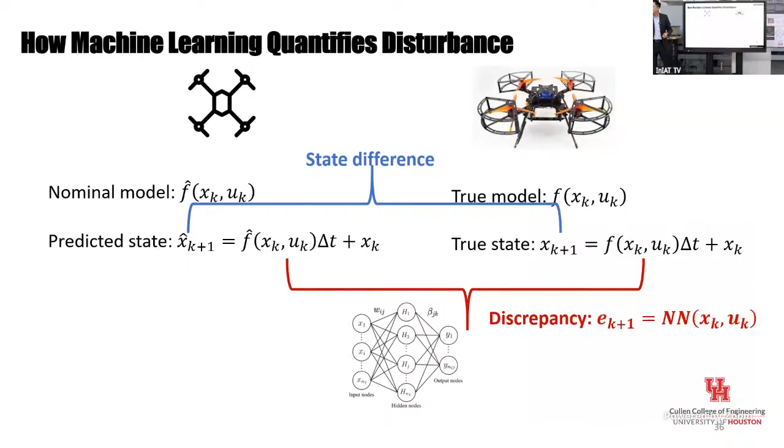The true state minus your previous predicted state, you will get the state difference. And if you do the difference of these two equations, if you can get the difference of the state, you can get the difference of your model. So if you do supervised learning, the y we call the label, right? So the label will be the difference of the state, and the input will be your current state and your control action. But you need to collect a lot of data. So each step, you have your x, u as input, and the difference as an output, as a label.

But you need to continuously run your system, right? Collect probably 10,000 data, and then you do supervised learning. You have a neural network. Usually for a control problem, if you don't consider any perception from the camera, the neural network is pretty small, 3 layers, fully connected; a control problem doesn't need a very big neural network. After you get this neural network, you add it to your original model. You can design your controller. Okay, this is one possible, very famous paradigm for learning for control.

Okay. How much precision do you need to have about the nominal model? And in that case, how much discrepancy must the AI control agent be able to solve? Okay, so what you mean is, what if this model is so bad, right? There's a huge difference with your true model.

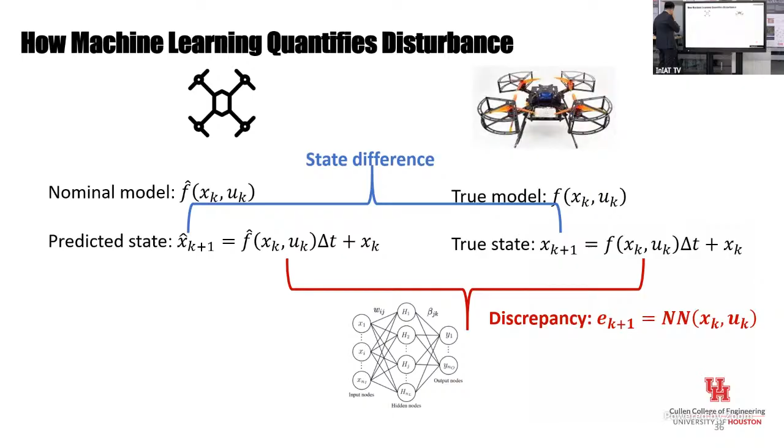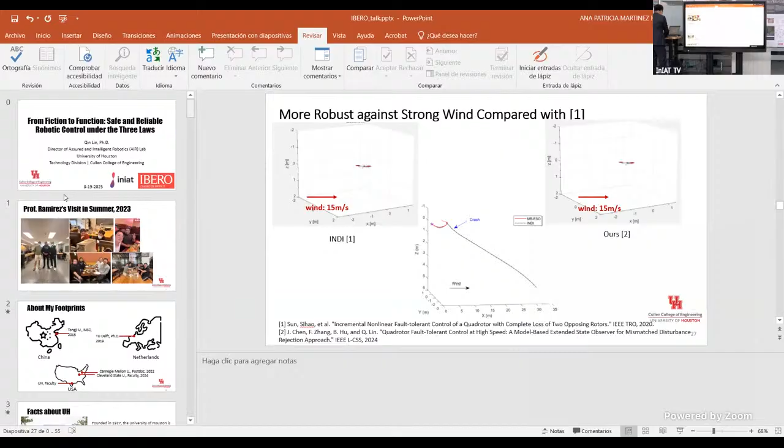Yeah, that's a very good question. I think for our drone, there is one nice thing, I think we showed it here. That's a very good thing I want to share with you guys. This drone, because most of the drones nowadays use PX4 or ArduPilot as their firmware, right? And the challenge is that the code base is very large, millions of lines of code. Students cannot read all of them. And my drone actually is from China.

The nice thing is that you just need to focus on the control part. If you're a control guy, you just need to know Simulink. You design your controller algorithm, right? And Simulink can automatically generate C code for you inside the PX4. That will make your task easy, right? You don't really need to dig into the C++ code. And I can show this drone to our professors here, and you can see if it's suitable for your problem. Yeah. Thank you very much. Sure.

Sure. Well, in one of your slides, you mentioned something about control barrier function. I don't know if you have heard about the algorithm A star, the planning algorithm, right? Okay. Yeah. I can talk about that. So for robotic systems, you always have the control level, the planning level and the perception level. So the A star algorithm is typically used for path planning. So you have obstacles in this room, and I want to navigate from that position to that position, right? You first need to plan a path, right? A star is very popular.

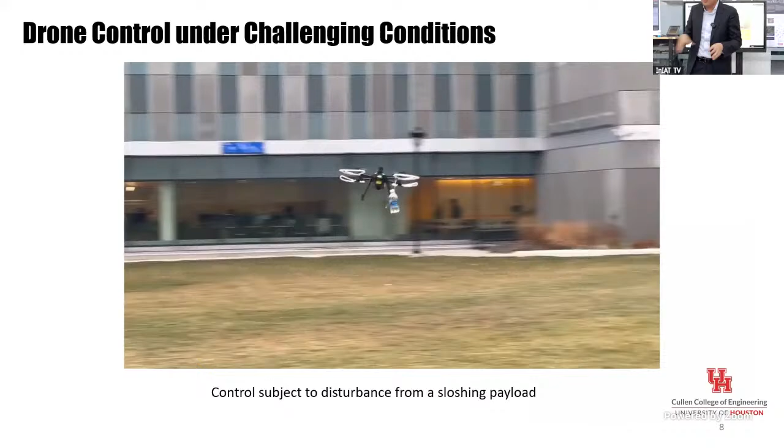But the problem of A star is it's in the planning level, because it doesn't consider the dynamics of your robot. From position A to position B, you don't really consider the low-level dynamics. So what we typically do in robotic systems is that you have your A star, right? You send it to the low level, and the low level will try to track this path. So they're actually at different levels.

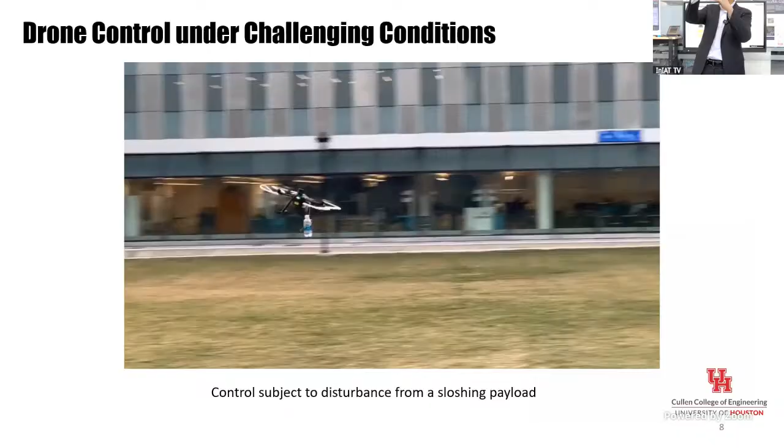The control barrier function is the same thing, both of them are used for collision avoidance, but the control barrier function is in the lowest level, okay? In the lowest level, you consider the dynamics of the robot, and you need to make sure your robot tracks your A star path and also considers the dynamics and the uncertainty, disturbance, whatever. Okay. Yeah. Do I answer your question? Okay. Cool.

Hello. Hi. First of all, thank you for your conference. Thank you. It really amazed me. Yeah. All about modern control observers has always blown my mind.

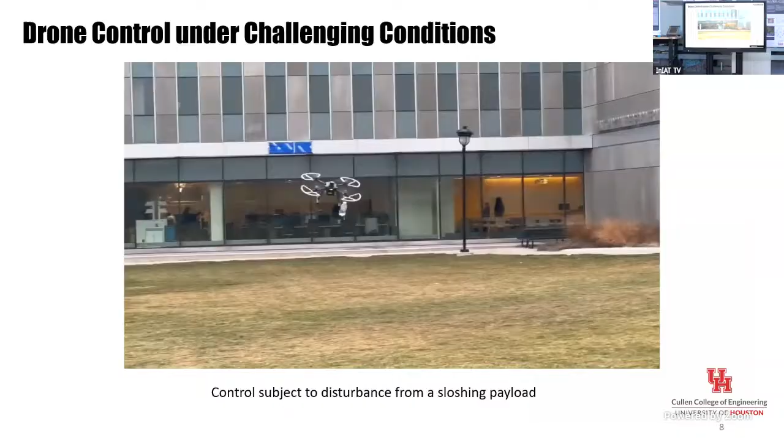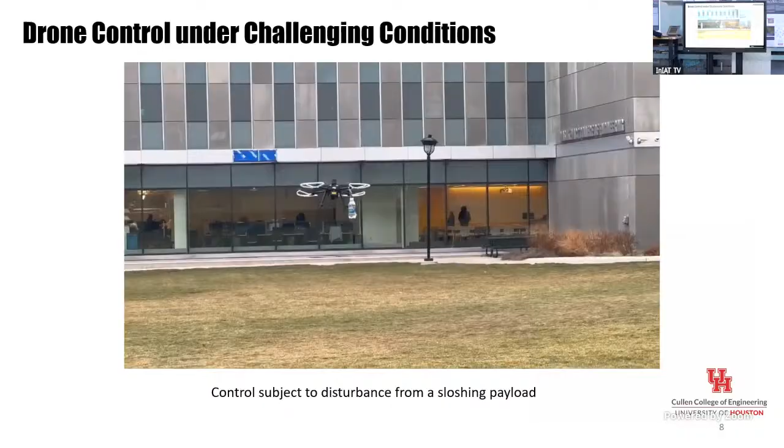And what really is my question is not, well, it is related to the conference, but what's the next step for you? Like you already mastered how to avoid collisions. Yeah. Well, it's mostly avoiding collisions, like either with people or while landing. Yeah. So, through your eyes, what's the next step, or what are you researching now?

Okay. Yeah, that's why I really like the safety problem, right? I think on the safety problem, I can work for decades. Why? If we talk about the safety of an airplane, people are still working on airplane safety, right? Probably every 10 years you can improve one scale of the safety. You know what I mean? For airplanes it's already safe, but there's still a lot of room to improve, right?

And now if we look at robotic systems, autonomous driving, right? It's far away from being safe. Even though you consider a lot of disturbance, most of the disturbance we consider now is from the lower level, right? The interaction of the vehicle tire with the ground and some bumpy road, for example, and for the drone, wind. But you always have other disturbances.

For autonomous driving, a very, very challenging disturbance is what? Human beings, right? You always need to interact with human beings. A human being can be reasonable or unreasonable, right? So under what kind of assumption and what degree of safety you can guarantee is still not a solved problem, right? Because you consider some disturbance from the low level, but you don't consider people's uncertainty, and you don't consider perception uncertainty, right?

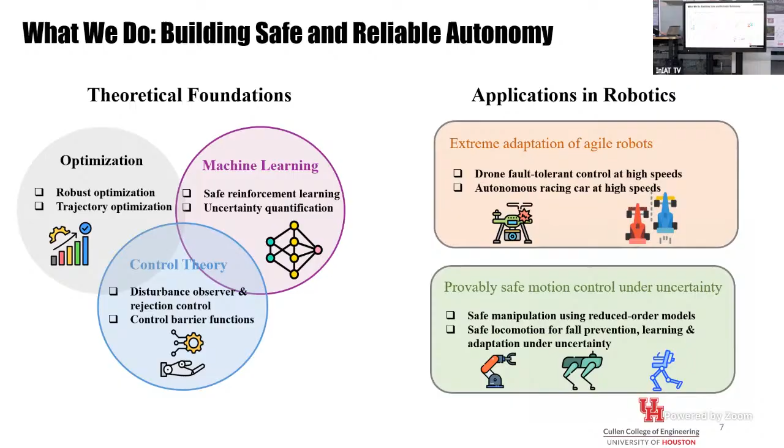And another thing is you have your training data, and your X's and U's are for a certain regime of values, right? What happens when you extrapolate from those values? Does the neural network give you something completely unexpected, and then your controller has to compensate for everything? Yeah. So in our framework, your neural network can be... I think it's here.